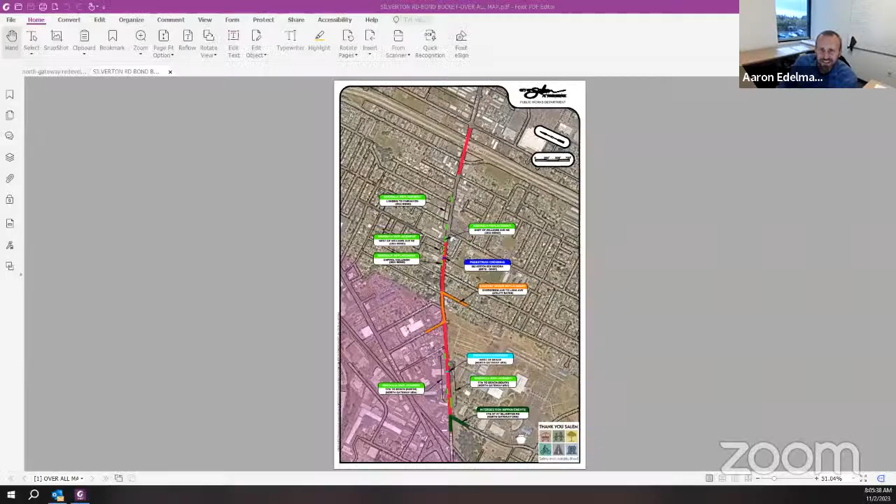Everyone able to see this map? Yes. It's been a couple months since we chatted about the Silverton Road project, so kind of forget what we shared last time, but we're still moving ahead. This map shows some pieces that have probably been added since the last time we were here, at least formalized. The project started as a bond funded pavement R&R project, shown in red, essentially from 17th Street all the way up to Fisher.

You'll notice there's a little missing chunk of red from the Williams intersection up to Beacon. That's because the city paved that chunk as part of the 2008 Streets and Bridges bond, so that segment has a much newer paving condition than the rest. So this red is the bond funded pavement R&R.

Some additional stuff has been added, and the piece you're probably most familiar with is the intersection improvements at the 17th Street intersection, shown in green. It's really more of a T shape, though we show it now as just a green chunk in both directions. That's the piece funded by the North Gateway URA.

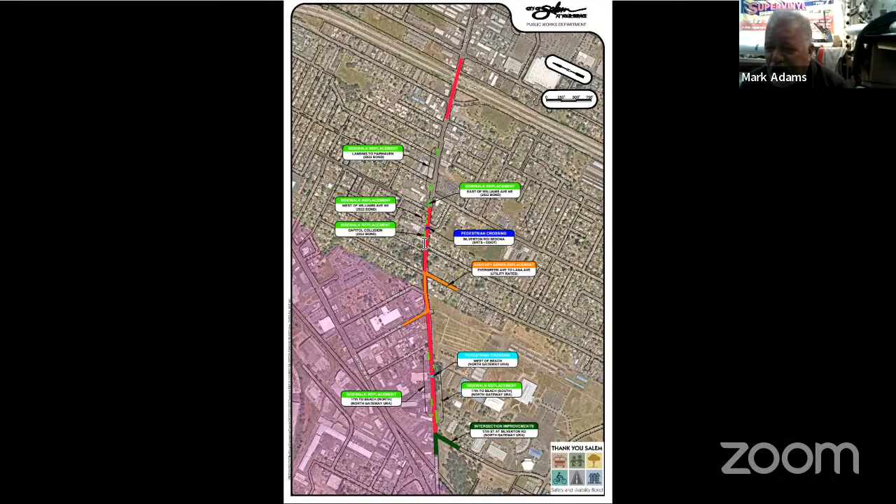I've got a question. Last meeting, or way back when I was here, you were talking about widening Silverton Road from the fairgrounds down to Lana Avenue, and you were debating which side of the road to widen. Can you update me on that?

I believe the discussion was around the Silverton at 17th intersection, so that's where the widening would have been. I thought it was moving past the fairgrounds down, and the question was whether businesses would be impacted. So I guess that's what I'm looking for the answer to.

Fair enough. So one of the things we've been asked to look at by the bond subcommittee and some members of the council is to evaluate a road diet on Silverton Road. We're looking closely at that right now, and the reason I bring it up is it would impact how this intersection improvement looks.

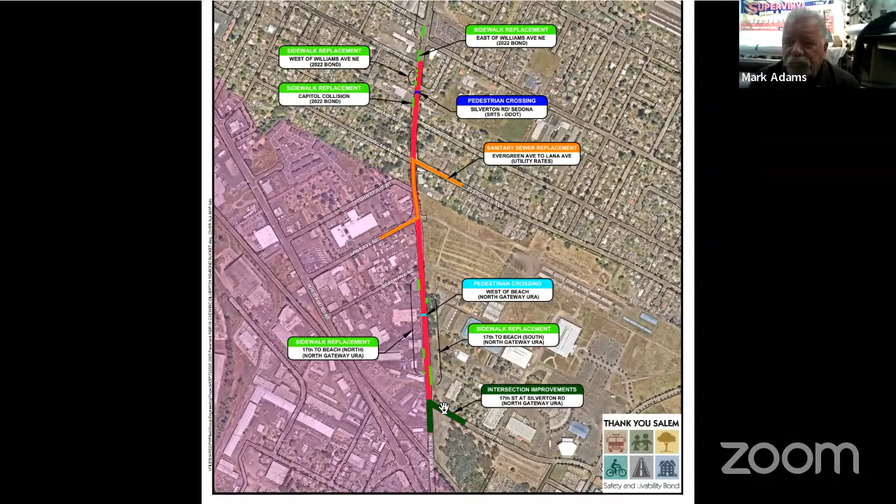The main piece of this intersection improvement was to add a left turn lane. If a road diet is done, it would naturally create that left turn lane in this area. There would still need to be improvements, but it would have much less impact on the adjacent properties and businesses. We're currently evaluating that pretty hard, and it looks like from an operations perspective it will work. Essentially it takes the road cross section from the existing 4-lane cross section to a 3-lane cross section, one lane in each direction with a center left turn lane.

And why that works a lot of times is, in today's state where you've got 2 through lanes each way, you get a lot of folks stopping in the through lane trying to make left-hand turns, and you get a lot of rear end collisions. When you create that left turn lane, it allows them to come out of traffic and still let the one through lane flow. So it actually provides some pretty good safety benefits in the right areas, and it looks like this one will work pretty well.

So, not a definitive answer, I guess, to your question. Yeah, no, very good, thank you. That's what we're working on right now, and that's what we're looking at.

We're trying to work through those before we get too deep in design and have to start anything over. So we do have a design consultant hired, Westech Engineering, a local engineering firm here in town. They've completed the survey work, and we're working through some of those concepts like the road diet right now and what that would look like.

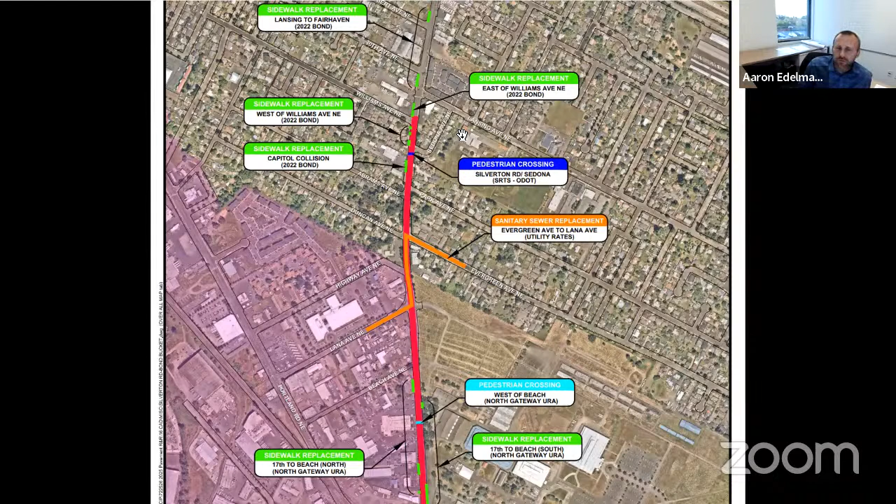And so does that also hold up the intersection at 17th and Silverton? Well, this is a lot more work than the pavement R&R piece, so we would likely start this in 2025 as well. We'd want to get that kicked off. It does need a new traffic signal, and right now traffic signal equipment has extremely long lead times, some of the longest we've ever seen. Poles and cabinets are about 36 weeks out, so we'd want to get that stuff ordered and get it going. We'd probably start the improvements there as well.

We don't have that entirely figured out from a schedule perspective, but some of it would be up to the contractor. We would place some restrictions on them to make things logical, so they couldn't tear this up on day one and let it sit for two summers. We wouldn't want that to happen.

Does that answer your question on that one? Yeah, sorry, somebody called my phone and it kicked me off. Did you hear the answer? Yes, I did. Okay, all right.

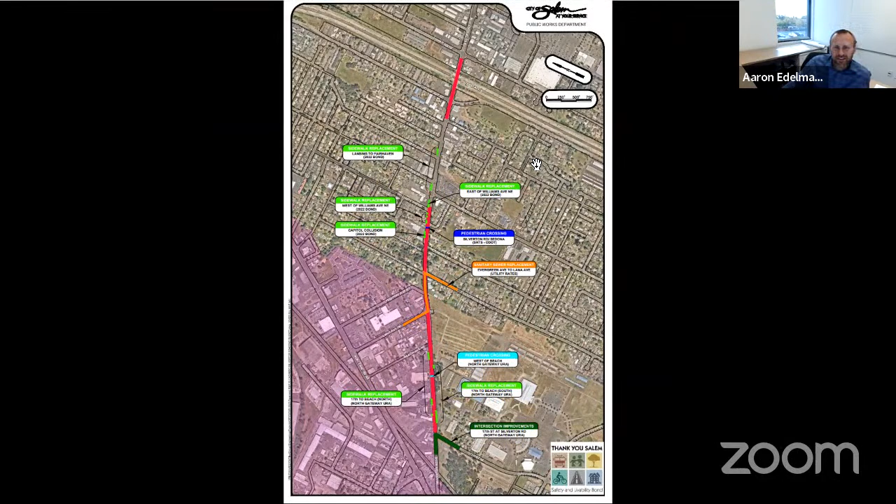Thank you. So that's where we currently stand with this project. Any other questions I can field? Anybody? I've got a question.

This might be a Sara question. Is the money that we had set aside for this part of the project, are we going to have enough money with the cost of everything kind of going up?

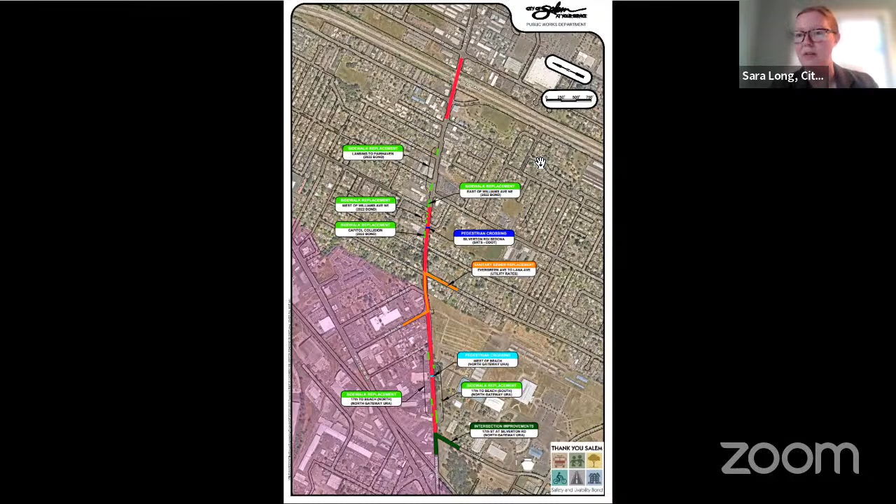The board might remember, back in February and then again in March or April, we discussed this. Initially, when we had gone through maximum indebtedness and identified all of our projects, we had gotten some updated cost estimates, but those were 2018, 2019 numbers. We threw in 3% inflation, but obviously that's not what's happened. So when we went through the budget process, Aaron had already provided us some updated numbers, and we ended up putting in another 3.5 million just because of the additional complexities.

And then we also decided we're basically splitting the cost of the sewer upgrades, because they will provide an improvement to the URA and to future development and all that kind of stuff. So we threw in another 600 to help compensate for that as well. At this point, we look pretty good.

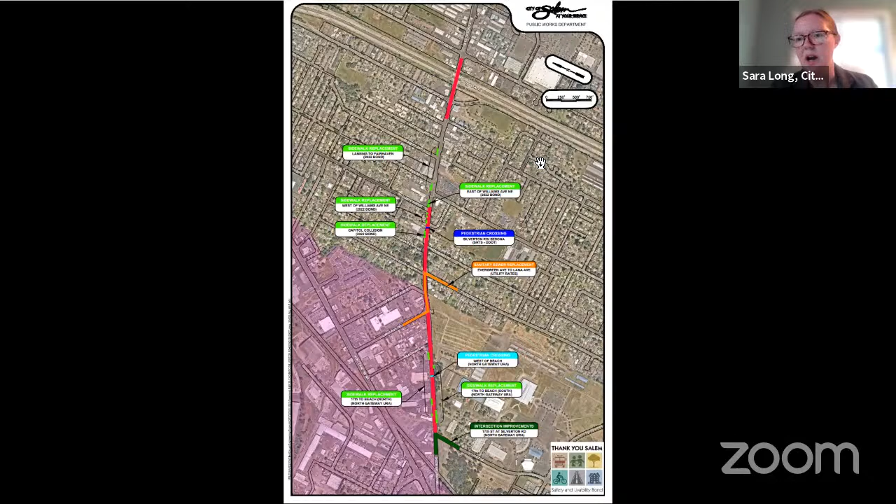There was a conversation back in either March or April when the bond projects had come out and gotten narrowed down. We were going to be able to package up our 17th project with the bond, which means we're getting a lot more, but it also means there's this question of can the URA kick in a little more here or there to get more for your money. So that's where we decided to pull some of those future Pine Street extension dollars to help cover for some of the pedestrian crossings and things like that, so that instead of just having the 17th intersection and then going five or six blocks with nothing, we could make it a complete project.

At this point, I'm not looking to ask for more funds for this project, but Aaron and I have had conversations about where we think the numbers might lie. The other thing we brought up is there's a future bond project tied to Portland Road and infrastructure projects. So what I've mentioned to the board is, yes, we have our list, but it's also an organic list.

As these questions come up, that's where we decide, hey, we had money set aside for the Pine Street extension, but that's not happening, so that's the first pool of future funds we're pulling from to cover costs. If we end up needing more funds on other projects, that's where we decide what's the higher priority. Those are the things I would bring to the board, but I don't expect to have to ask for more funds beyond what we've already discussed.

But until design is done and until we go out for bid, we won't know 100% either. So we think we're being really conservative and putting enough in there, but we'll have to wait until we can go out for bid to know for sure. At this point, I don't expect to come to you and say we need 2 million more or something like that.

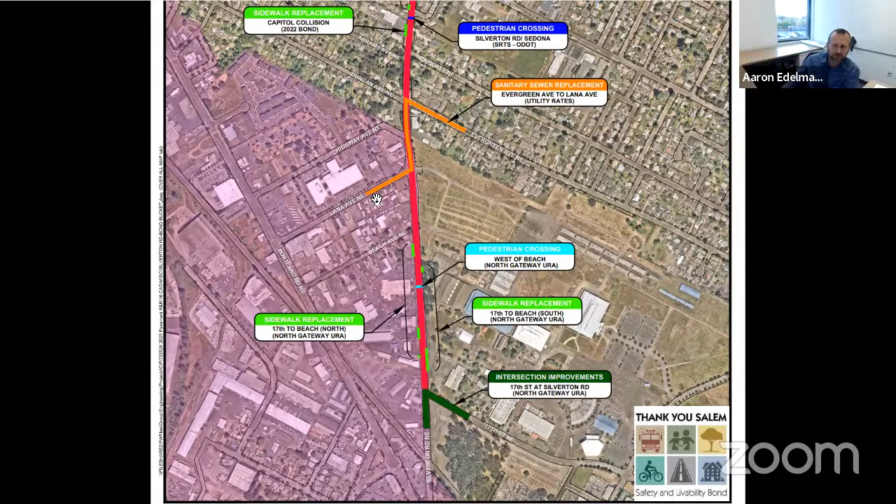I've got a question associated with that. How much of this project can be done by city crews and how much of it is sent out to bid? This project, due to the size of it, would all go out to bid. Okay, yeah.

Aaron's going to be out there pouring pavement. You're going to see him. Go for it. Times are tough.

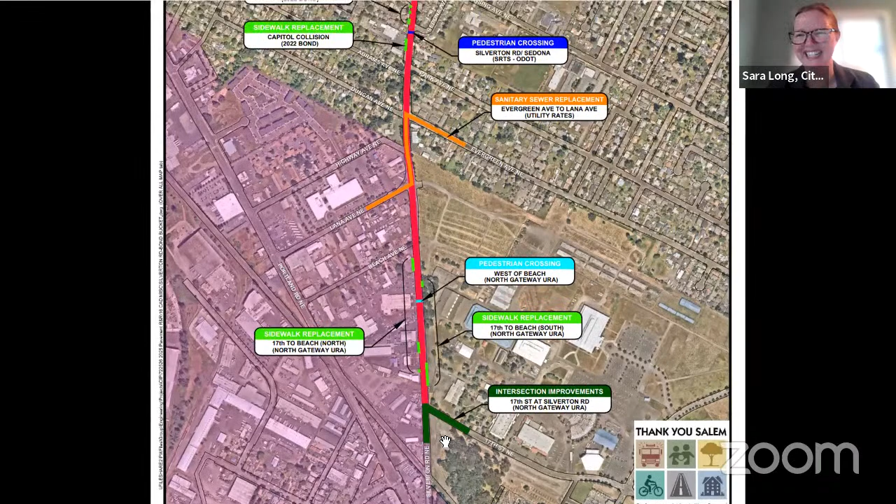I do know that our operations folks have on their list to pave from the 17th Street improvements to the tracks. That was slated to happen next summer, but we said, wait, don't do that—let us make our mess, then you fill in the gap, rather than picking a distance that ends up too short or too long. So that will be city forces after this is all done; they'll finish the paving from where we stop to the railroad tracks.

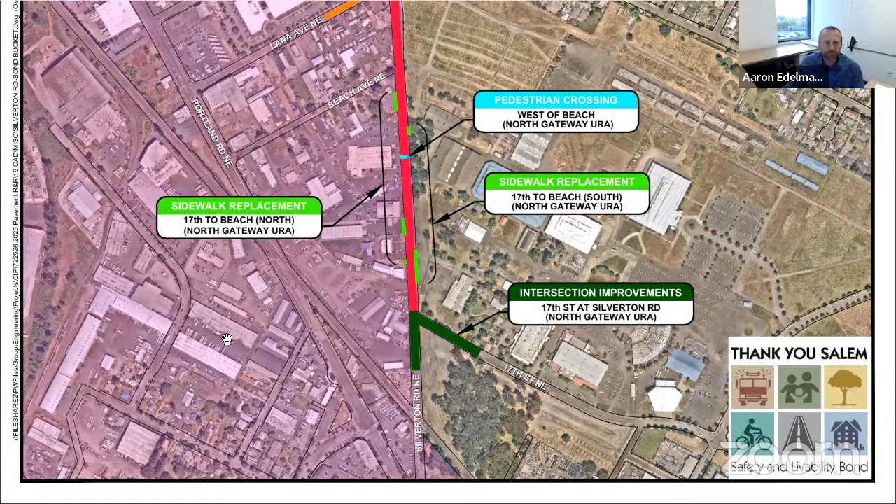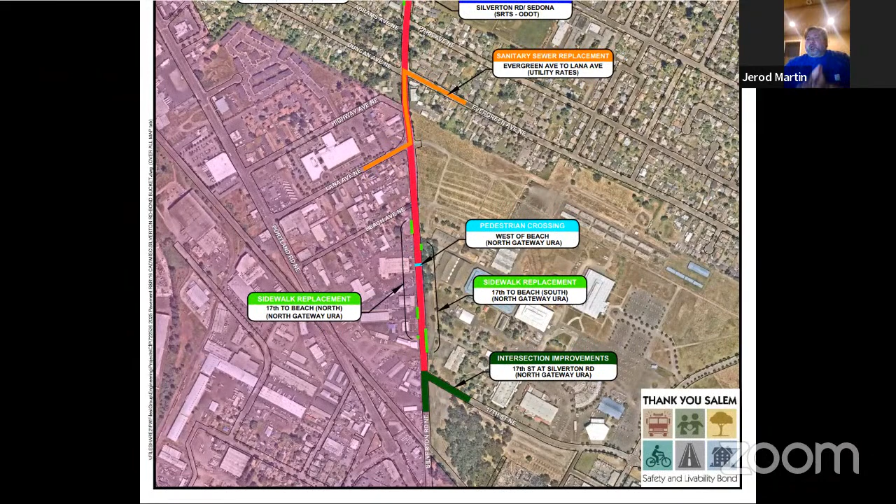All right, anything else? Any more questions? Well, thanks, Aaron, appreciate the update. Yeah, how do I stop sharing, Sara? I lost my button.

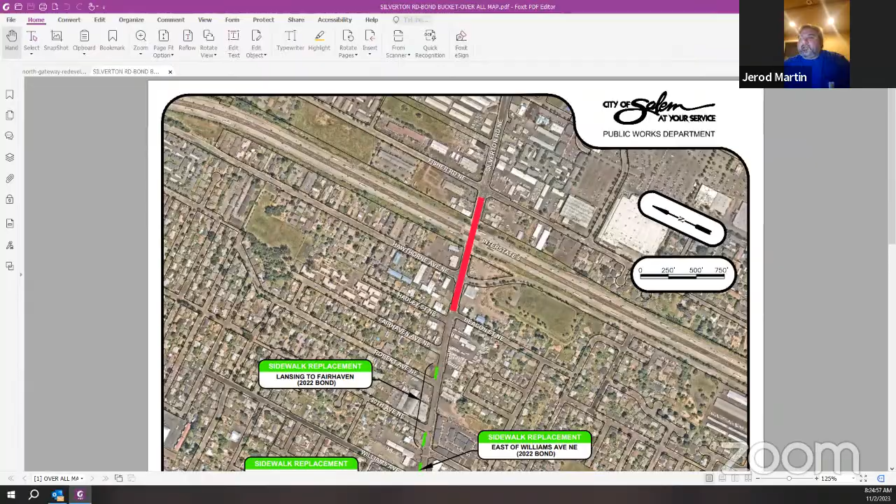And the next thing we have, I'll give it to Robert here in a sec when he can share his screen. Hopefully he has a great update about our Welcome to Salem sign. Good morning, Robert. Good morning, everyone. Just a quick introduction—I'm the city's park planning manager, and I'm in the community services department.

This is a project I've been working on for longer than I care to admit, but I think I have some good news to share with you all today. We are talking about the replacement of the city entryway sign on Portland Road near the intersection of Hyacinth. It's located right where that red marker is on the map, right after you get off the interstate and drive toward the state capitol.

I'm going to start with a little roadmap of what's happened in the past few years. This project came to me in late 2019 with a concept that Mark Pictel had developed through some community outreach, and perhaps some of you were involved in that. A community artist had generated a concept with a lot of community buy-in, and I worked with that community artist to refine the concept over the past few years, though it's been done in several phases.

Beginning in early 2020, as the pandemic was starting, we began formally developing the replacement sign design. We hired a consultant, and they did a lot of the work for us in terms of developing construction documents. We've hit some roadblocks along the way.

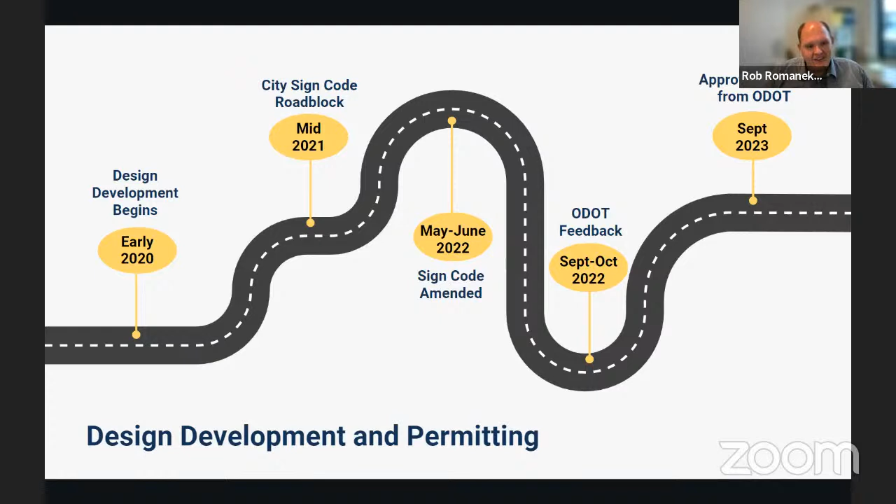One of the first things I identified is that the canoe was a little problematic from a cultural interpretation perspective. We wouldn't want to put that kind of symbology on a city sign without consulting with the tribal governments that the city has a relationship with, and that process is quite involved. So I advised that we should probably remove that element to make sure the sign could happen within 5 years or so. That was the first thing we addressed, and we replaced that symbol with a cherry branch, again representing that Salem is also known as the Cherry City.

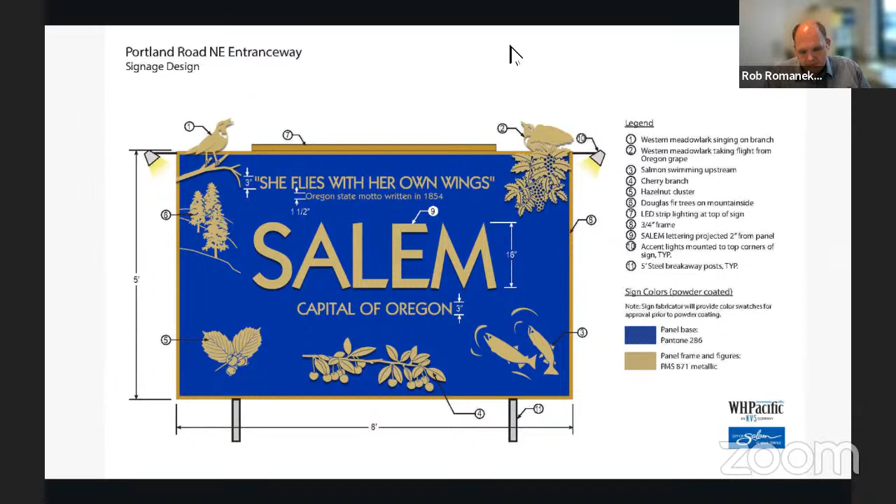ODOT had some concerns with some of those elements. The colors have changed a little bit here because we have a different designer working on it, but it is still gold, the frame is still gold. Now we have the city blue, and we've simplified some of the symbology to make it more about Salem, less about the state, addressing concerns from ODOT. Also, the lighting was removed from the signs and is now on the ground, I'll talk a little bit about that in one of my next slides. But a lot of the symbology has remained: we have the cherry branches and the Western Meadowlark, the state bird, at the top there, and we've kept the statement that Salem is the capital of Oregon.

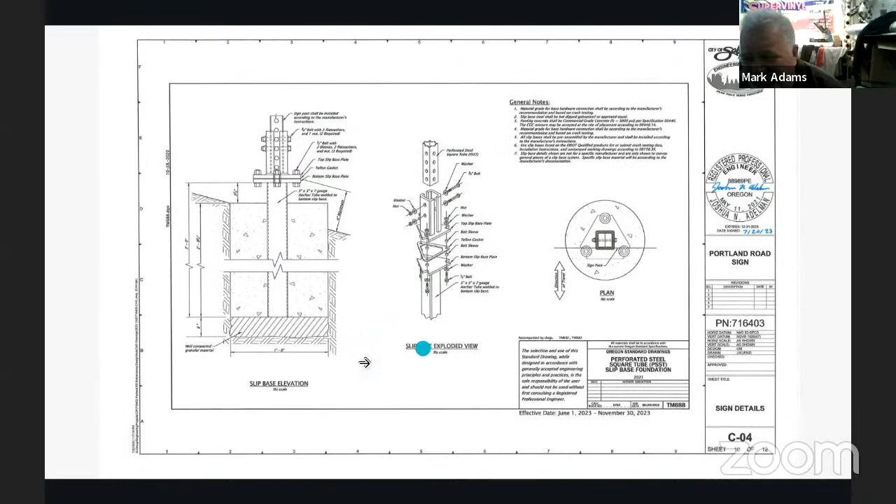What's the elevation from ground to the bottom of the sign? From the bottom of the sign to the ground is 5 feet, and that is the maximum height ODOT will allow it to be. That's perfect for graffiti. Yeah, we would have preferred it a little bit higher, but the state has some administrative rules, and we're bounded to the size and height of the sign, so we're at the max on both regards.

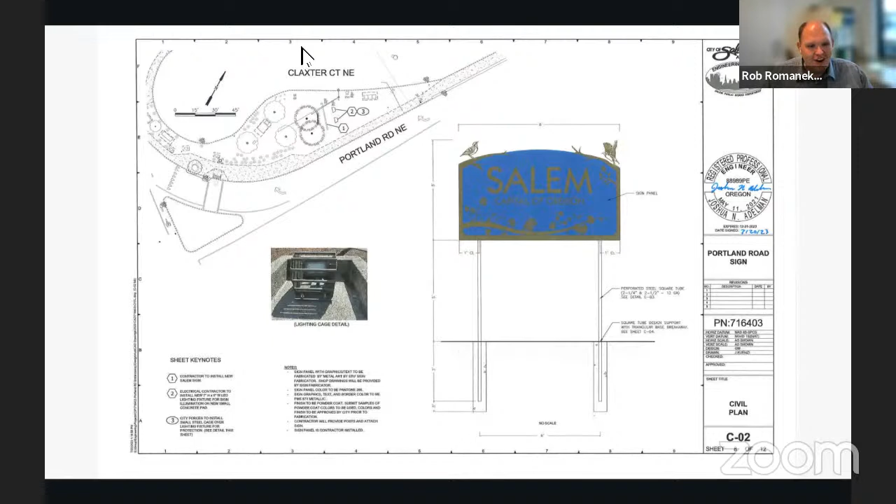ODOT also requires that the sign be on what are called breakaway posts. So in the event of someone having a traffic accident and hitting the sign, this element of the design would break away and hopefully prevent the loss of life. That's the idea, and the sign could be replaced, obviously.

I just want to highlight one more thing, and then I'll open it up to questions. We're gonna rehab the site, it doesn't look fantastic right now, it definitely needs some love, and we're planning to do that. The trees behind the sign, our pine trees, are diseased and not doing well, so we're going to remove those and replace them with cedars. Those should be really attractive, healthy new street trees behind the sign. We're also going to be planting a lot of Oregon grape to deter people from hanging around and loitering near the sign, while also making it very attractive, along with some other native plantings.

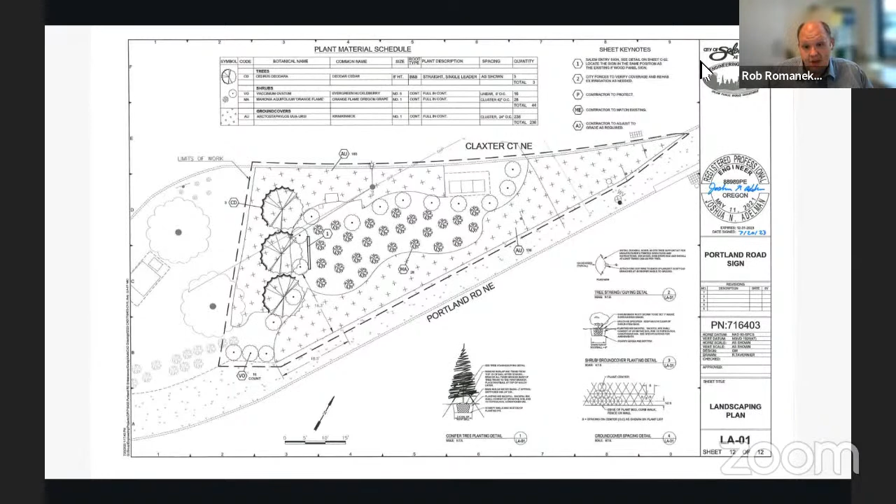Again, the overall size of the sign? Yeah, so it's going to be 5 feet high and 8 feet wide. That's the largest we're allowed to have the sign.

I'm in the sign business, and I have a very serious concern about vandalism. Five feet high is not going... Are you going to put any graffiti-resistant coating on there? What are you going to do? Yeah, so it is going to have a graffiti-resistant coating, so we'll be able to hopefully abate most of the graffiti that gets placed on the sign.

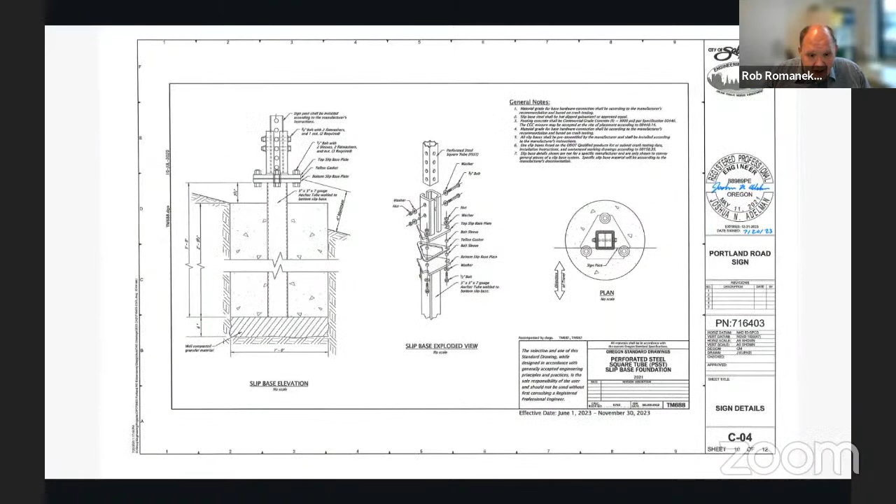I want to back up on the sign area. The size of the sign itself is 5 by 8. Let me back up, I don't want to misspeak - it's going to be 5 feet off the ground, so from the surface to the bottom, the sign will be 5 feet. City code on signs for any building downtown is 7 feet off the ground. So it's kind of interesting that according to their codes it's 5 feet off the ground.

I'm not going to argue with the people there, I'm just saying we need to anticipate problems. This is a powder-coated sign - powder coated aluminum, you said? I don't believe it's going to be aluminum, but yes, it is going to be powder coated steel. Okay, well that'll make cleanup a little easier. Okay, well thank you.

What did the cost come in at on this project? We're still gathering estimates from the various forces working on this project, but we're anticipating we'll stick with the original budget. We have about $44,000 to install the sign, and it looks like that's potentially going to be adequate. There's also a potential that if we have cost overruns, we'll take some savings from a playground replacement at Wallace Marine Park and transfer some of those over to this project. Those savings were TOT funds, and essentially this project is TOT funded, so we're just transferring over some of those funds. We're not sure that's necessary at this point, but it's a contingency in case we don't have enough funds.

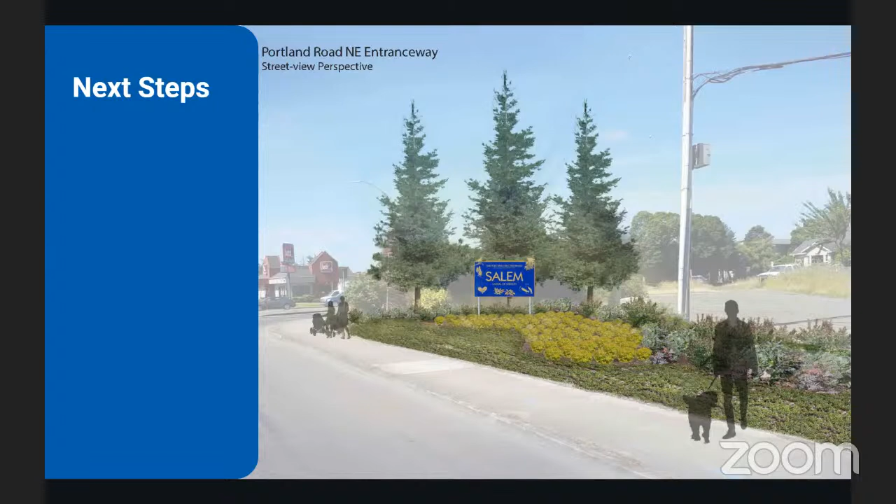Thanks, Rob, and I appreciate the work resurrecting and the perseverance on this. One question: do you know how many other entry 'welcome to Salem' signs currently exist in the city of Salem? I don't want to misspeak, but there are approximately a half dozen sites in some shape of entryway sign. We have one in West Salem on Wallace Road as you enter, and then there's one on Front Street, or it might be River Road, as you drive between the cities of Keizer and Salem. There are surely some others I'm forgetting right now. But there was one on South Commercial as you enter off of I-5.

Great, thank you. Yeah, thanks, Robert, for staying on this for so long. I know it must have been kind of hard when you go to the city and can't get a permit for something for the city.

Sometimes you just gotta have a good sense of humor and just be persistent. That's the big thing, you know how that is.